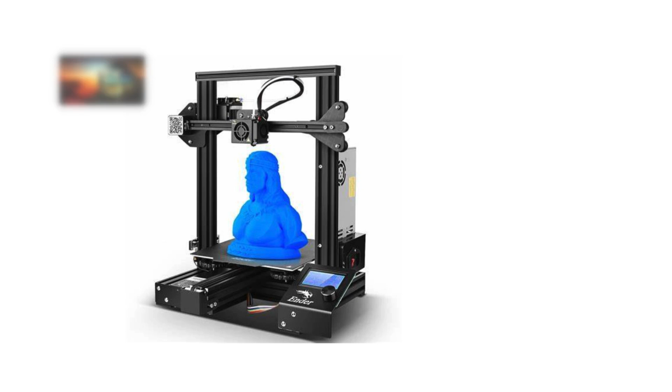3D printing, a concept that appears to have been adopted straight out of science fiction movies. 3D printers can create everything from small toys to intricate parts for industrial-grade machines. But just how do these machines work?

First, let's define what 3D printing is. Also known as additive manufacturing, 3D printing is a process that creates three-dimensional objects by building them layer by layer from a digital model. This technology has revolutionized industries from manufacturing to healthcare, enabling rapid prototyping and custom fabrication.

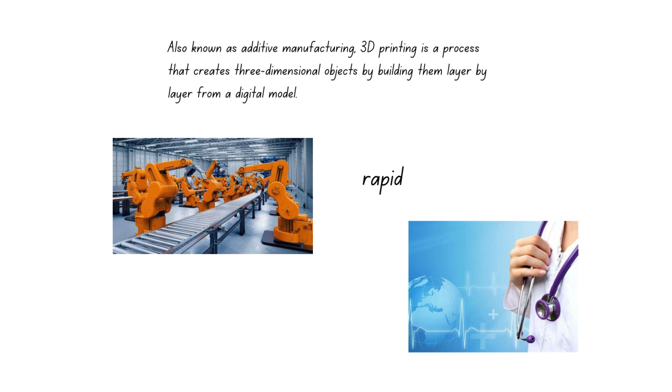The 3D printing process begins with a digital design. Using computer-aided design software, a designer creates a virtual 3D model of the object that they want to print. This 3D model is then sliced into thin 2D layers using a slicing software. Each layer represents a cross-sectional slice of the final object.

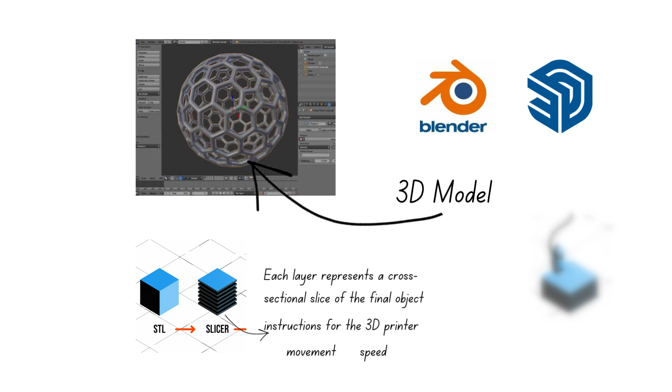From this, a set of instructions that the machine can carry out when printing each layer are then generated. These include the movements that the machine has to carry out and the speed at which it can do this. After the machine receives these instructions, it constructs the 3D object by adding material, layer by layer.

Here are the main components of a 3D printer. Print bed: the surface on which the object is built. Extruder: the part that feeds the printing material into the printer and melts it, and houses the hot end of the printer. Hot end: this is the heated nozzle that deposits the melted material during printing of the model.

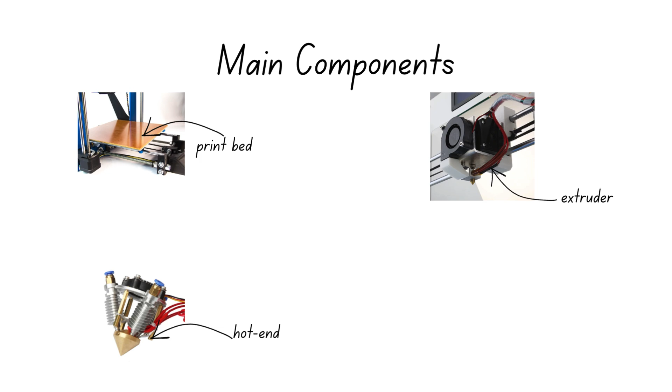Stepper motors: these are motors that precisely control the movement of the extruder and the print bed. Control board: this is the brain of the printer, responsible for coordinating the movements and functions.

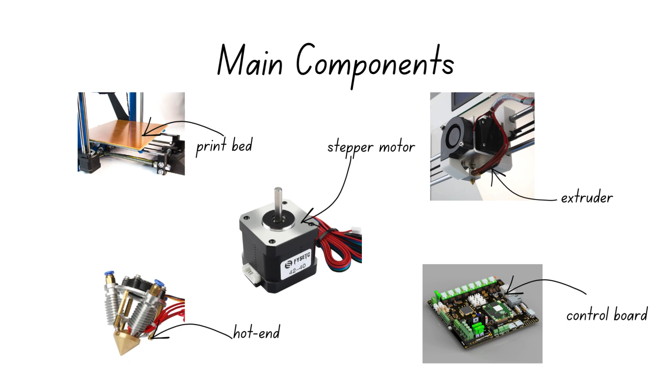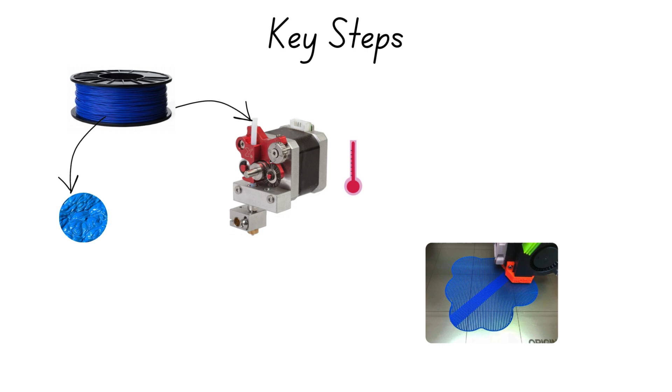The printing process itself can be broken down into several key steps. Firstly, the filament, usually made of plastic, is loaded into the extruder. Then the extruder heats up to the melting point of the filament material. When this has been achieved, the printer begins at the bottom layer, depositing melted filament through the hot end onto the print bed. The extruder moves in precise paths, guided by code generated from the sliced 3D model.

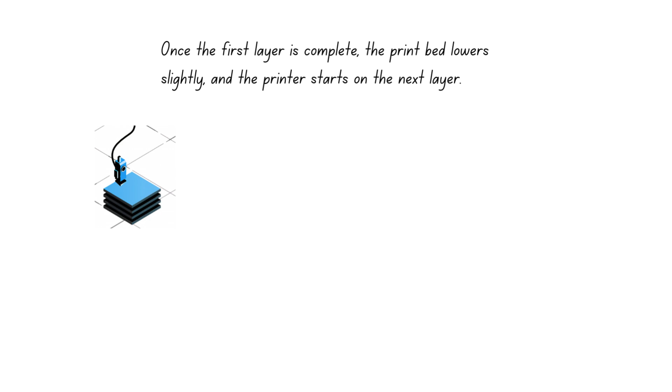Once the first layer is complete, the print bed lowers slightly and the printer starts on the next layer. In the model discussed here, the print bed can only move up and down, while the extruder can move in the two horizontal dimensions. Other 3D printers may have these movements arranged differently. This process is repeated until the entire object is built.

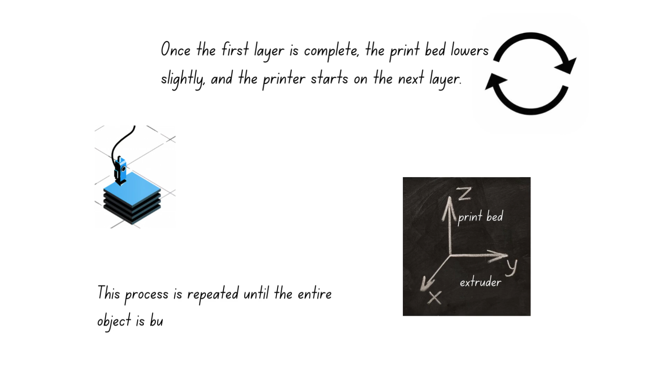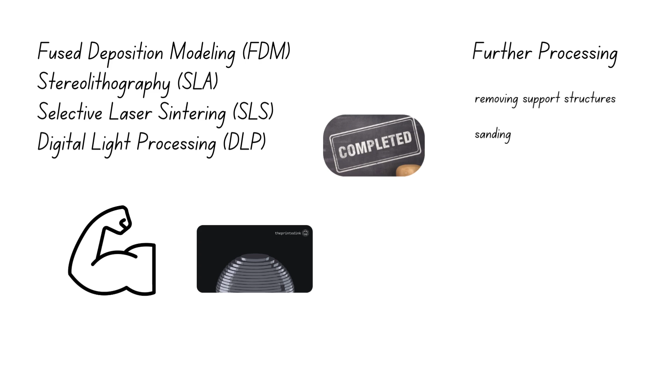In reality, there are several types of 3D printing technologies, each using different methods and materials. Once the printing is complete, the object often requires some further processing. This can include removing support structures, sanding, or applying additional treatments to improve strength or appearance. Depending on the material and the complexity of the design, post-processing can vary significantly.

That's it for how 3D printing works.